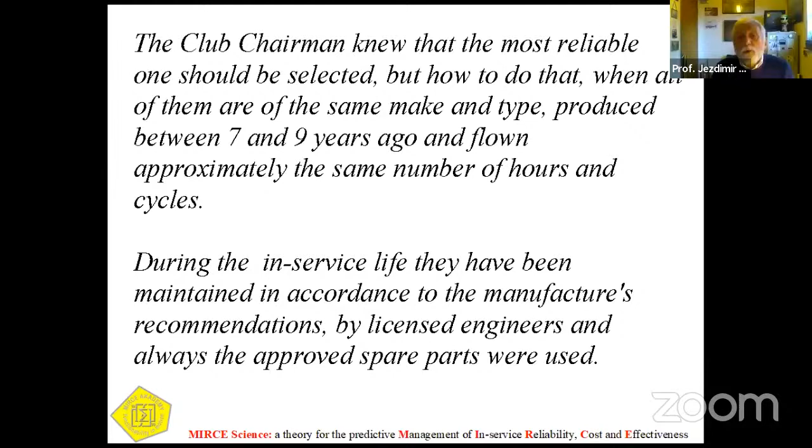During the in-service life, they were maintained in accordance with the manufacturer's recommendations by licensed engineers, and always the approved spare parts were used. So we have a good example of a very well looked after fleet, in accordance with all manufacturer and design recommendations, with qualified personnel. So in essence, this is my illustration. This is what the fleet looks like. Whether we have 2 or 12 or 200 or 1,500 Boeing 747s flying around the world, from outside, from a manufacturer point of view, they all look the same.

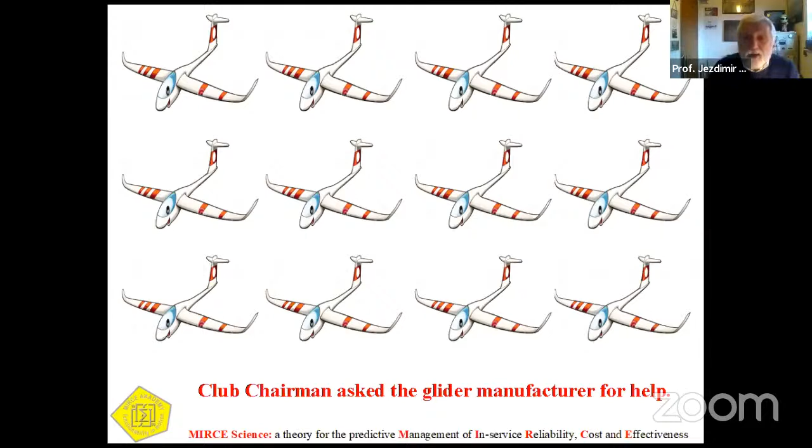So the chairman asked the glider manufacturer for help. Of course, the glider manufacturer says that is very important, we use all our relevant reliability data, and they provided the data. So in typical reliability manner, there is a reliability block diagram, which I am just sketching with 4 components in parallel and series, just to illustrate. Not that I'm teaching you what the reliability block diagram is, just to put things in the story.

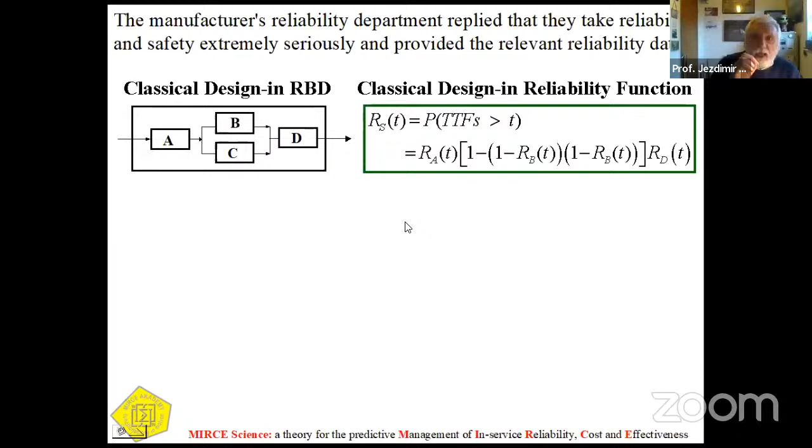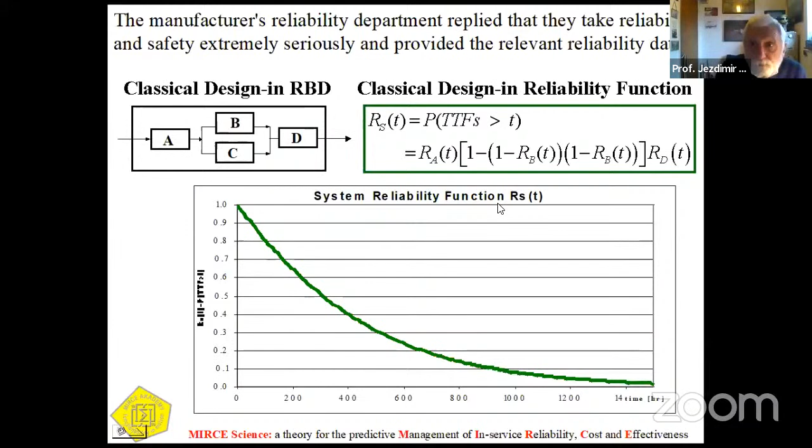We've done the study. We now have our classical reliability function. The reliability of the system is the probability that the system will survive to the time t, with those components connected in series and parallel. And if we put in some adequate information, purely for illustrative purposes, we will get the well-known reliability curve, which we learn in beginning courses in reliability, but that is the fundamental of the last 50 years of doing system reliability. Okay, so now the chairman says, but what is the reliability?

Well, the reliability engineer says, well, it is the probability that the new system will not fail up to the stated time. Well, that really starts bothering the club chairman, because he says, well, but none of my systems are new. They're all 7 to 9 years old. So what do I do? Well, that's really a good question.

Because if we pick up any point on our reliability function, any point, mathematically it is of a neutral nature. If you look at it from the reliability point of view, then it is a smiley face, because that face now tells me that the probability of not failing from here to here is whatever it is. But however, there is another side of the reliability curve. So that is this area here.

So what is that probability? Well, that probability is a very sad face, because this is the proportion of those who started at 0 which are not in service anymore. So now, if they are not in service anymore, what's happened with them? Where are they? What is this probability? How does that probability apply to real life, and what can we do to change it? Because really, what is the meaning of that? That's what I want to say for a not new system.

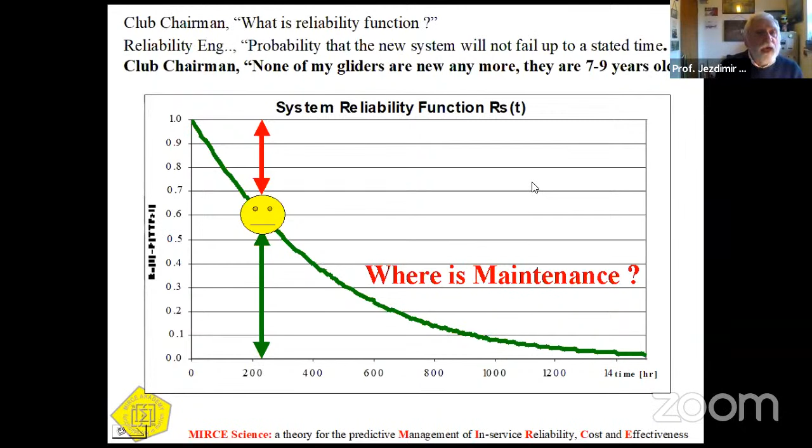Okay. Well, the main objective of this presentation is to introduce you, the audience, as reliability professionals, to the MIRCE Science approach, which is based on the prediction of the real-time reliability based on the current in-service data of each individual system. So the reliability function, which I already showed you, is related to 1, 10, or 1,000 systems of that type. Now, after 5, 10, 15, or 50 years, each of them went through a sequence of events which makes them individual.

And now we don't have an individual reliability function for a 5 years old system with tail number so and so. So the recent developments of new technology based on digital transformation and data connections enable the application of this method to real life. So we had a theory, now it can work. Additionally, considerations regarding the execution of targeted maintenance tasks are justifiable, as the concept of replacement just in case could have even negative consequences on in-service reliability of the system.

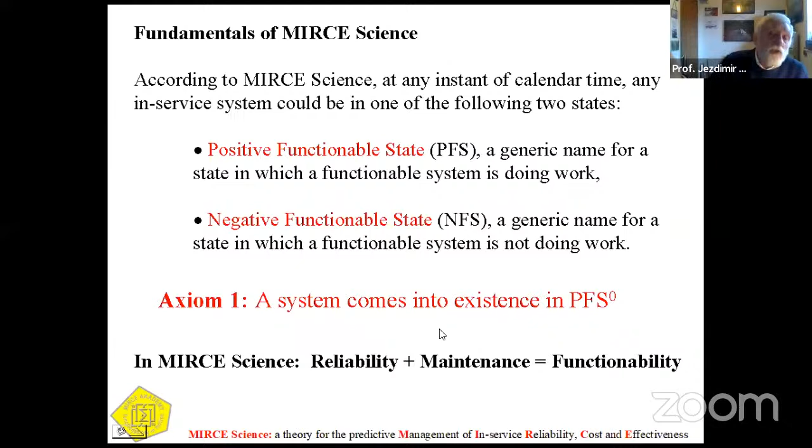In translation, just to put it briefly, in MIRCE Science, functionability is the new word which I created in 1993. But in essence, it is addition, combination of reliability and maintenance. Reliability is design-in characteristics of the system. Maintenance is in-service process, in-service property. So when we put together, we get functionability, a word which is new for some of you, but that is what it is. That's what I call it.

Okay, so the MIRCE functionability field is the new creation which enables a system to exist through time. It is the set of functionability states, positive states for i equals 1 to infinity, and negative states for i to infinity. System is born in state 0, and the system finishes life at the negative states.

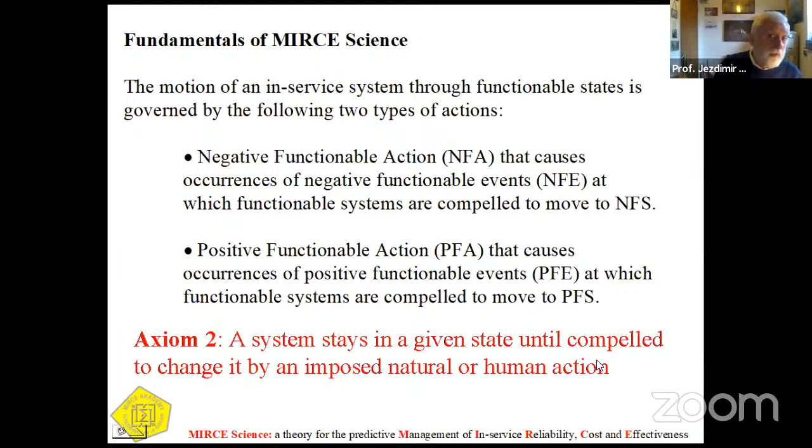Tsunamis, corrosions, fatigues, and the rest are natural actions. Human actions are scheduled replacement, cleaning the filter, inspection of the power plant, whatever they are. So when a power plant has annual inspection, it does not work. In some cases it does. When you change the oil in your car, the car doesn't work. So if you're a taxi driver and you're changing the oil, you're not making money. Your business is down, so you're in a negative state.

What we need now is to find this notion - we talk a lot about physics of failures. What I'd like to touch on here is the physics of maintenance. Because a reliability block diagram is not enough to tell me the states of the system.

For example, units B and C, which are in parallel, in one maintenance option, could be sealed into one box, which is replaced after the failure of both. So the systems are in parallel, but the box works until the system fails. So B and C within the box are in parallel, but from the system's point of view, the system will fail when both of them fail. Okay, so this is now our reliability equation.

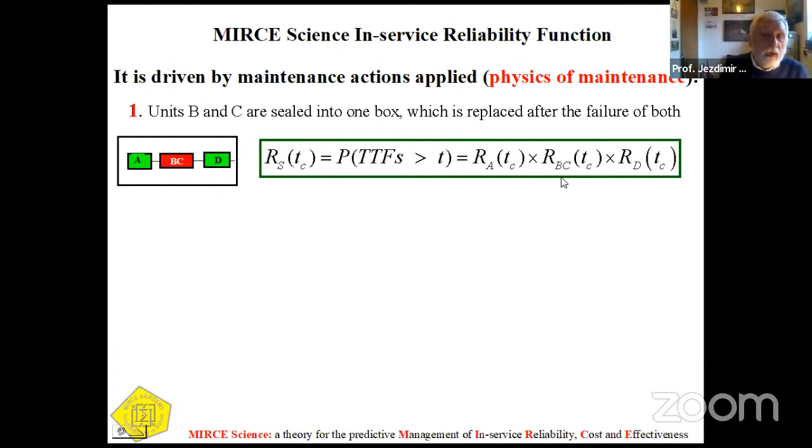From a maintenance point of view, due to maintenance and that design, now we don't have RB and RC in parallel anymore, because we don't know which failed first and which second - we only know when both of them fail. Is it BC or CB? We just don't know. So that's a different picture.

Now another option: units B and C are in the same box, but replaceable after the failure of each one, either B or C. But unfortunately, to do that, we disrupt the in-service function. So that is a different curve. Now, yes, they are in parallel, and during the replacement of one, the second one is working.

There are many other options. Units B and C are totally in separate boxes. Yes, they are supporting the system function in parallel, but they are totally in different boxes, and we can inspect the boxes and do different things.

So what I'm really trying to say here is to address the royal question of addressing the reliability of systems which are not starting from new.

You can see my age and experience. From very, very early on, I always challenged myself on that reliability definition: reliability is the probability that a system will work for a stated time. I always asked myself, but where is the origin of the stated time?

So if I look at my car, is it the stated time when I bought the car? Is it the stated time when I installed my last set of tires, for the tires? What is the stated time for my oil filter, for my brakes, etc., etc.?

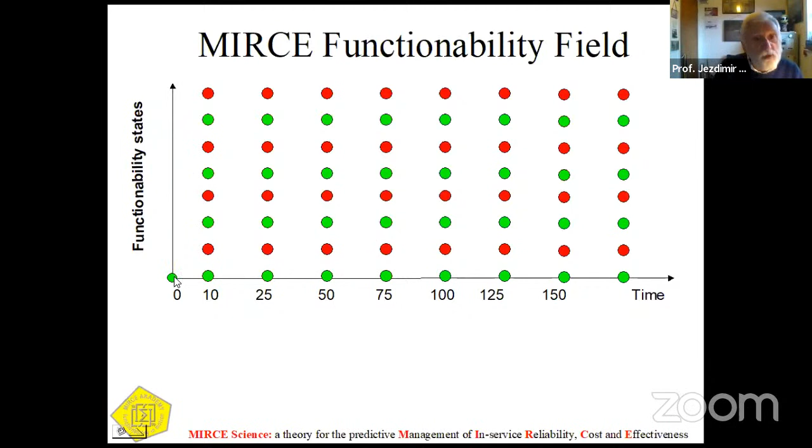In MIRCE science, life has a 0. So now I have a totally different picture: I have my functionability field, which starts theoretically from 0, and we know the whole story, and life goes on. But now, look at this - I can position each individual glider within the fleet on the MIRCE functionability field. Here they are.

So this one here is in positive state 4. This one is in positive state 2. There are 3 gliders here, 2 there, 5 there.

So see, now we have time distributed, real time, calendar time, and functionability states. Now I know where individual gliders are, because I know this is in time, this is real time. Today, this glider is here. And if I look at the logbook for this one, I know precisely the path from new to that place, okay? That is what I mean in real life.

So, according to MIRCE science, reliability of mission success. The mission success for the gliding club and its chairman starts from the moment when the royal foot touches the glider and goes in, and finishes when the glider successfully lands. That might be 20 minutes, 2 hours, or whatever it is.

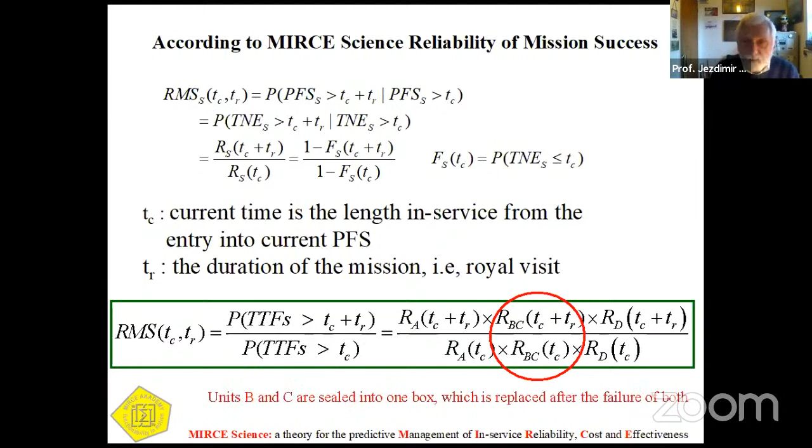That's what I said. So now I have a real picture of each glider, X-ray. I know the conditions. You see, if this one is the same box, I don't know that B has failed. So now why am I talking about maintenance? Because I could do maybe some inspections here, or maybe not.

So you see what I'm now talking about, I'm almost coming to the end, so don't worry, chairman, Dr. Warde, I'm on time. So look, we are now looking inside.

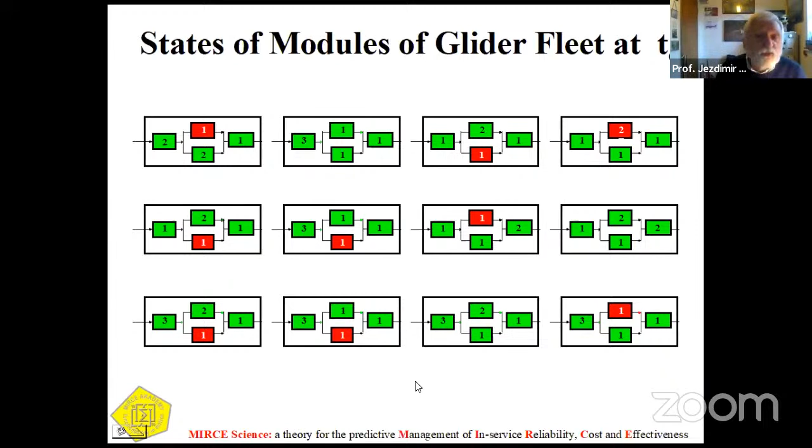We are now understanding the gliders. So there are not 12 identical gliders anymore. See, none of them are identical anymore. All have the same stripes and the same tires and wheels and the brakes and the chairs and the ashtrays, etc., etc. But no, through time, they are changing.

So my penultimate slide, purely for illustration, this is the probability of the Royal Mission success for the existing gliders fleet. Don't worry, I just did this example for myself a few days ago just to show you something. So what we have here, 12 gliders, each of them are currently in the positive functionability state, but due to their histories, probability of being in that state is quite different.

So now, based on this, the chairman of the club says, look, I will choose glider number 1 because it's the highest probability. But now the question is, right, you choose number 1, would you do anything to improve it? Now it's interesting. Now I'm going to shock you, but please don't get upset.

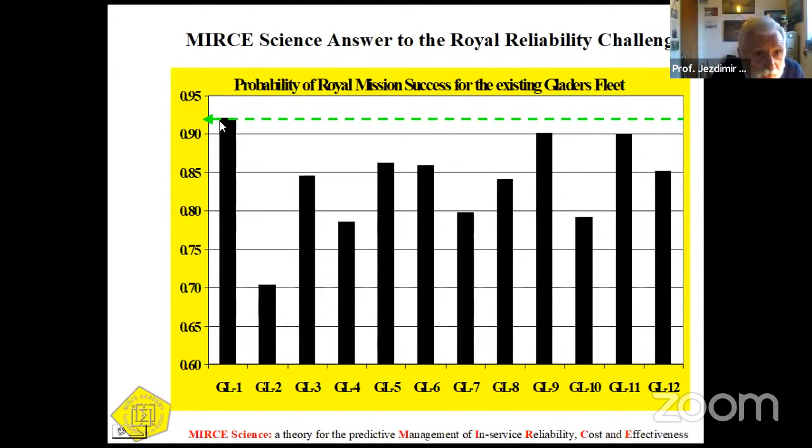What this graph says here, if I go now and hypothetically, this is purely my mathematics working. If I do changes of all others, just in case, you remember what I said? So look, unquestionably 1 is 0.92. So now that 1, which was the black block here, it's not the highest.

So if I do any maintenance tasks on the rest, I will notice now that due to the royal visit, the highest reliability is if I chose glider 9, and to choose glider 9, I have to change components B and C. So that's the total point.

So now, I hope you understood the narrative. Ignore this. If you want to learn it, we can learn it happily. It is simple and easy once you understand the philosophy, once you understand there is a life of each glider.

So my time is coming. What I want to say is that the last graph clearly illustrates the potential advantages of using the MIRCE science approach to the real-time management of individual systems that will deliver reliability, safety, and sustainability of the fleet considered.

So now, every morning with the Air Indigo fleet in Chennai, out of 50, 60 Airbuses or 737s, you know precisely which one is the most reliable because you have the mechanism to do it, okay?

Thank you, Professor. It was a very lively presentation, and I'm sure all the participants got how to use this reliability concept in the field in order to make decisions in real time. So this is a very important talk, and if anybody is having any doubts or any questions, they can ask the Professor.

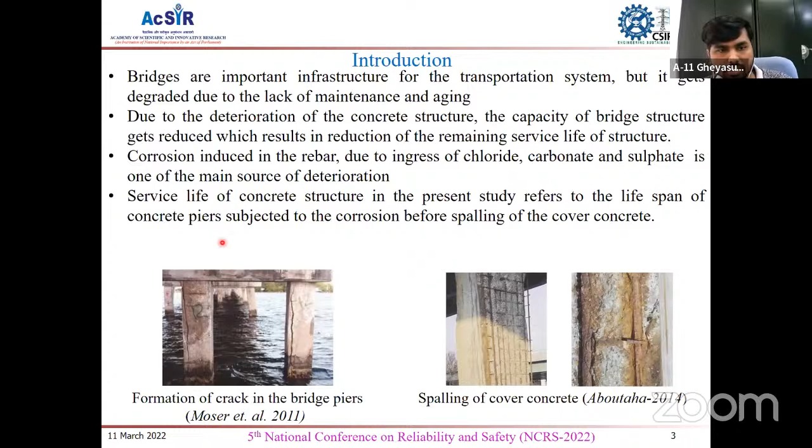So as we can see, whatever corrosion is induced in the concrete is due to ingress of chloride, carbonate or sulfate. Those are the main sources of corrosion. So in this present paper, I'm going to discuss the service life of bridge piers subjected to corrosion before the spalling of cover concrete.

So here are some of the deterministic models available in the literature. If we see the service life of a structure, various models are available. But if we talk about service life, Tuutti's models are the most widely accepted among researchers.

According to this service life model, we can see the corrosion initiation period and the propagation period. Service life equals the corrosion initiation period, T initial, plus T propagation, TP. So service life basically depends upon the corrosion initiation time and corrosion propagation time. But we have modified this service life model by dividing the corrosion propagation time into two parts: first, the time of corrosion before the first crack, and after that, before the spalling of cover concrete.

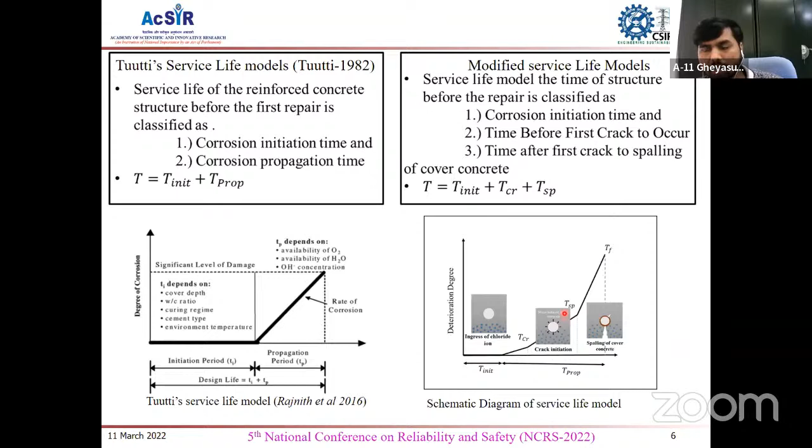So now in this diagram we can see T initial, after that T crack, and after that T spalling. It is not limited to T spalling. After the spalling of the cover concrete, it can take load further, but here we are going to study up to TSP, that means spalling of cover concrete. After the spalling of cover concrete, we need to go for repairing.

Corrosion initiation: once chloride reaches the surface of the rebars, corrosion initiates. The time taken to initiate the corrosion process is called corrosion initiation time. It depends upon the diffusion of chloride into the cover concrete, which can be modeled using Fick's second law. That is how we can model the corrosion initiation time.

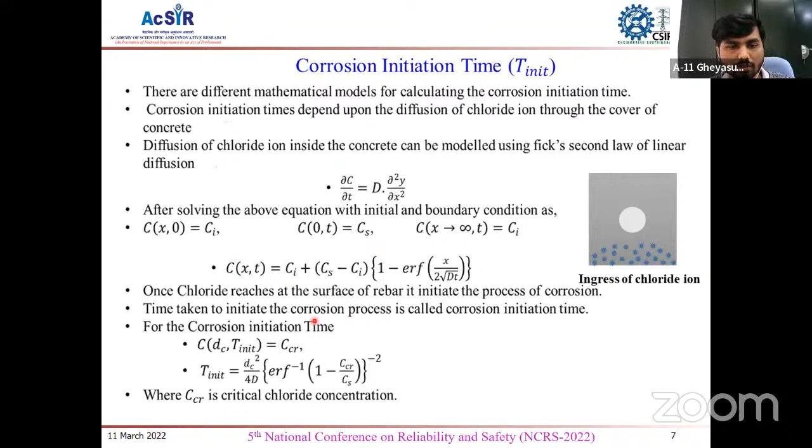After that, the diffusion coefficient, on which T initial depends, depends upon the water cement ratio, curing rate, environmental exposure condition, as well as material properties. In the literature, the model has been defined by Castaneda, showing how the diffusion coefficient is modeled, and with that they have modified the corrosion initiation time, which we are going to use to calculate the corrosion initiation time.

After the corrosion initiation time, we have to calculate the time after the initiation of corrosion. Once corrosion has started, volumetric expansion will start due to the rusting of rebars. Once there is volumetric expansion, hoop stress will be induced in the concrete. If hoop stress is greater than the tensile strength of concrete, then the first crack occurs. For modeling the first crack, we have models available, with which we can calculate the time for the first crack.

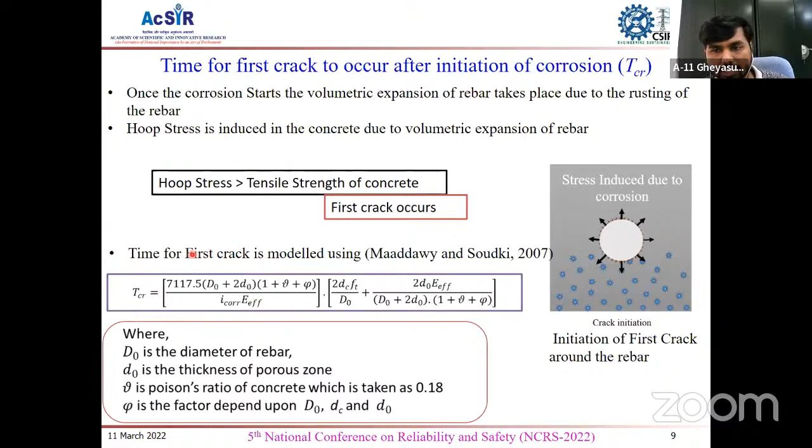Now once the crack has been formed, it will elongate and start propagating. Volumetric expansion keeps going and rusting takes place, so the crack propagates. Once the crack width is more than 1 mm, as from the literature, spalling of cover concrete happens. That time is called TSP, and we can calculate it using this model.

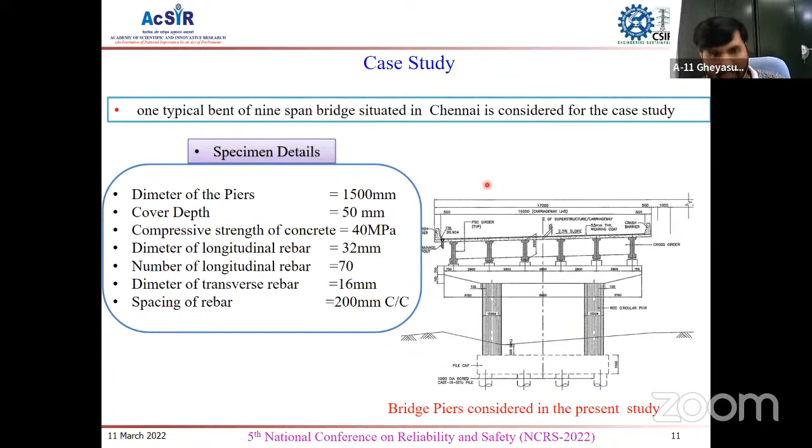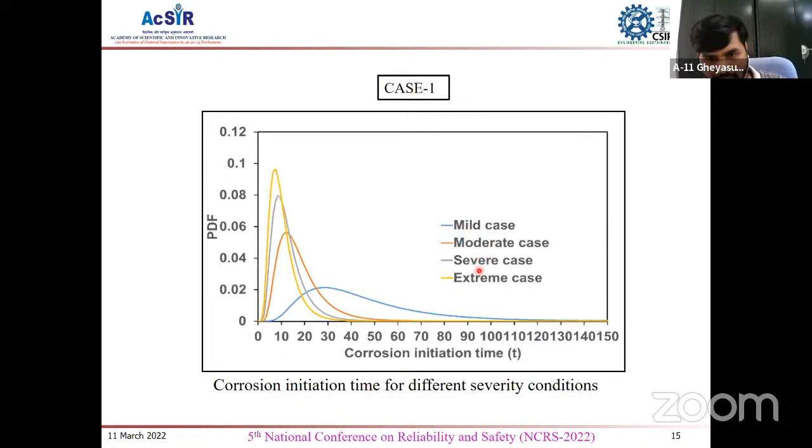For case one, if I have taken this corrosion initiation time, we can see how the corrosion initiation time is affected for the different exposure conditions, like mild case, moderate case, severe case and extreme case. After that, we have checked the distribution, and the log normal CDF is correctly fitting with this CDF.

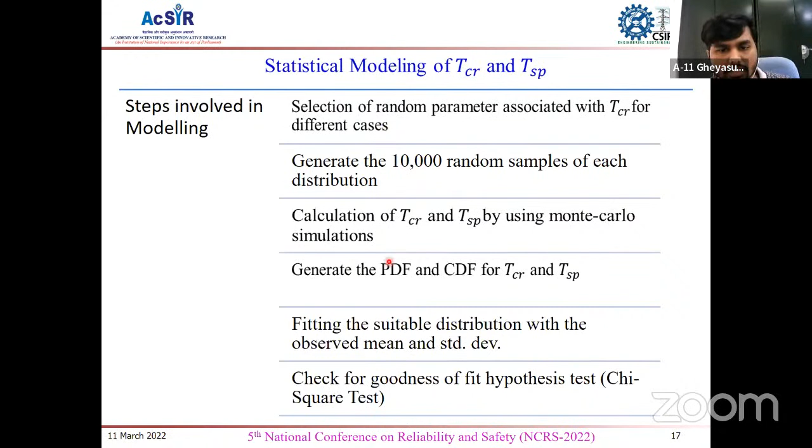Now in this paper, we have modeled the uncertainty for the RCC structure. We have identified the random variables from the literature, and we have calculated the corrosion initiation time, the time for the first crack due to corrosion, and the propagation time. After that, we have estimated the service life for conditions like mild, moderate, and severe. We have fitted the log normal distribution, and we have found that it is passing

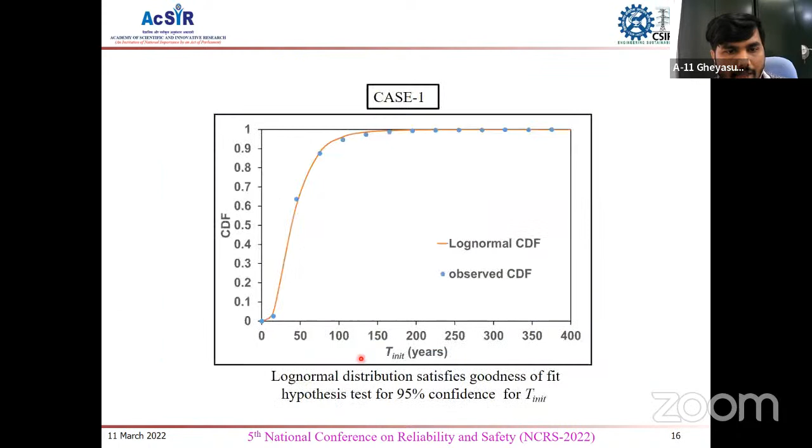I understand, but how do you define mild or moderate? Is it the level of pollutants, or what is the condition? You have not specified what is a mild condition and a moderate condition. Sorry, sir. Is it okay? You could understand now what I am asking? Yes, sir. I'm sorry, sir, I don't know much about that. Okay, fine. And about the confidence interval, confidence level?

Yes, sir. For confidence level, we have like a 5% risk factor. We have chi-square test tables. We did the chi-square test for this observed CDF and our log normal CDF. So we have two CDFs. We took the difference of these, summarized all those things, and checked whether it is fitting using the tables, whether it is passing at whatever the percentage is.

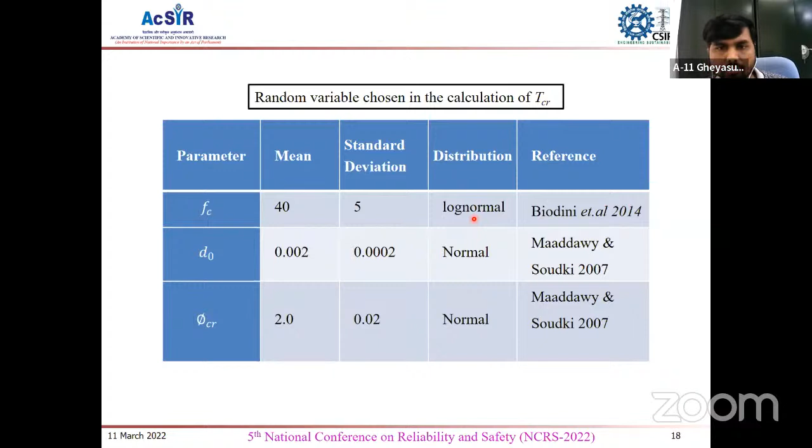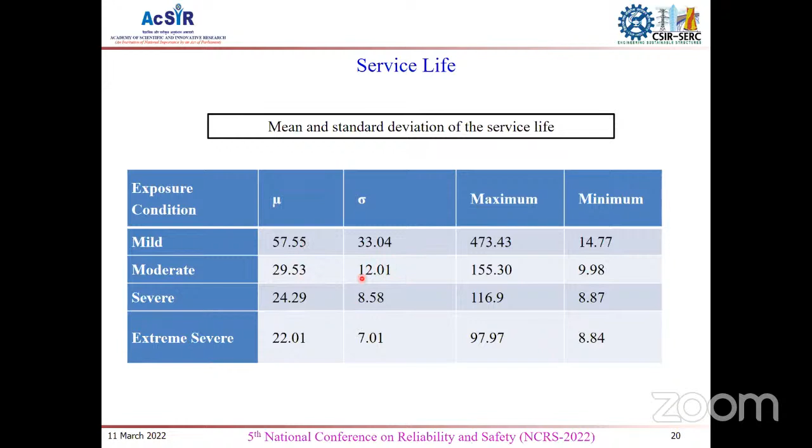Suppose we had only a normal distribution function, then the mean would be in that range and sigma would be less. But we have different distribution functions, so that can happen, sir. But then what is the justification for the selection of distribution? If you say it depends on the distribution, there should be some basis for selecting a particular distribution.

As far as the input parameters are concerned, whatever is suggested in the literature has been taken for the chosen random variables, sir. This is one of the authors, Kamakshi. So for whatever input parameters have been chosen, the suggested distribution functions and COV values prescribed in the literature have been chosen, sir. Based on those guidelines, the samples have been generated.

Okay. Yes, sir. But as you rightly said, there is a huge variation. The mean value is a query because the sigma is so high and very close to the mean, so statistically it doesn't justify. I don't know whether I can tell, but there is a problem in getting the KS test passed for 95% confidence. So only this chi-square test has been done.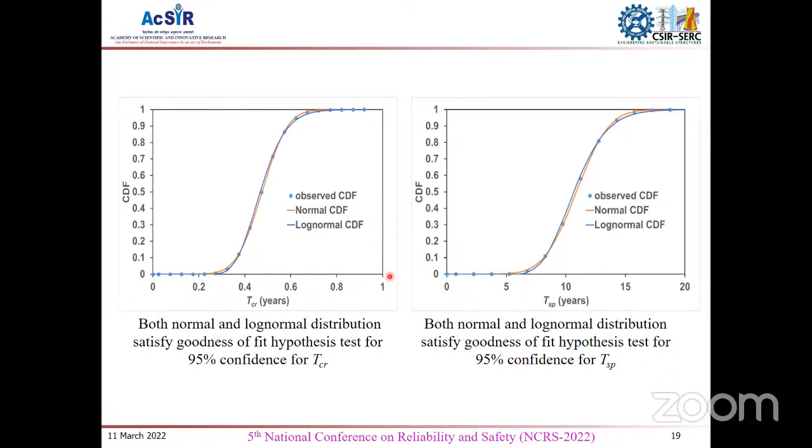Sir, if we see the initiation time, we can show you here, sir, for this mild case. Already there is a huge variation, and there is also one paper in the literature where they have reported the same, that the means and standard deviations will have huge variation.

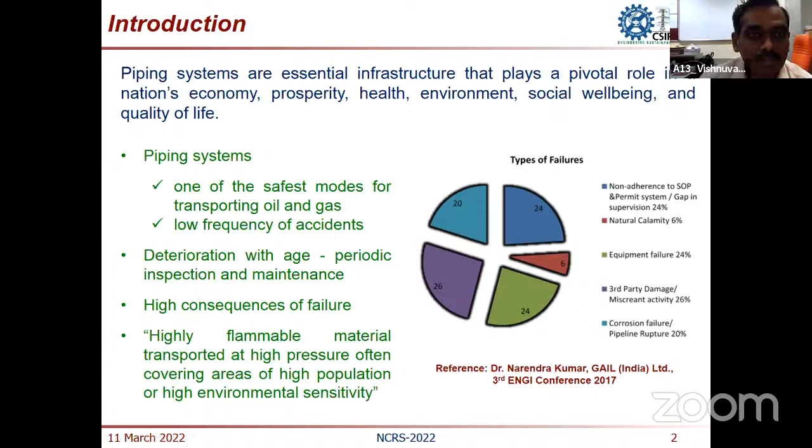So as we know, the piping systems for transporting oil and gas and also petroleum products are essential infrastructure that plays a vital role in nation's economy. And these piping systems are one of the safest modes for transporting oil and gas because the frequency of accidents are less. But nevertheless, the piping systems deteriorate with age, and hence the periodic inspection and maintenance of these piping systems are essential. And once the failure happens, the consequences are high because of loss of life and also the property.

And if you see on the right side, we have a pie chart where the different types of failures are reported in terms of percentage. So, for example, natural calamity 6%, and the failure due to corrosion and pipeline rupture are about 20%. So, this study is mainly related to this corrosion and pipeline rupture failure.

So, if you see the major causes of pipeline failure, it could be either due to external interference or corrosion or metal loss. External interference is mainly due to impact of foreign objects on the pipeline, mainly by third party activities. In the case of onshore pipeline, it could be due to excavation for development of projects such as roads, railways, and construction projects. And in the case of offshore pipelines, it is reported that it is mainly because of the impact of ship anchors or other underwater foreign objects.

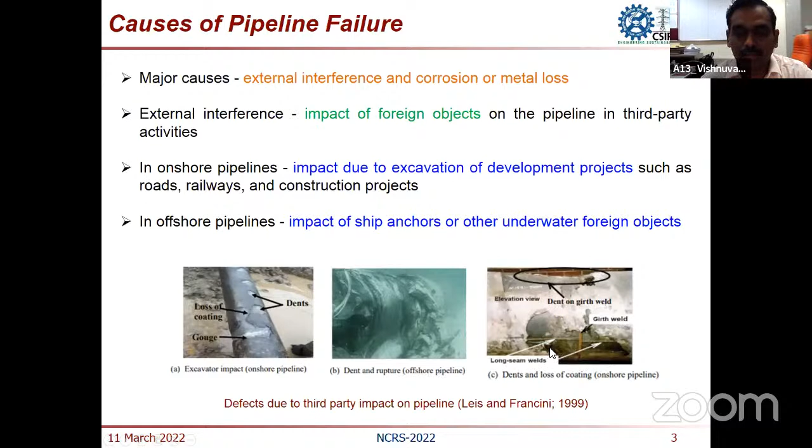On the bottom, we have figures where the different types of defects are shown. In the first one, we have dents, we have loss of coating, and what is known as gouge, which is basically a metal loss on the surface over a larger area. And these are due to external interferences in the onshore pipeline. Similarly, in the offshore, you can see there is a figure with the dent and rupture as one of the failure modes. And of course, we also have long seam cracks in the weld portion as well as on the pipes.

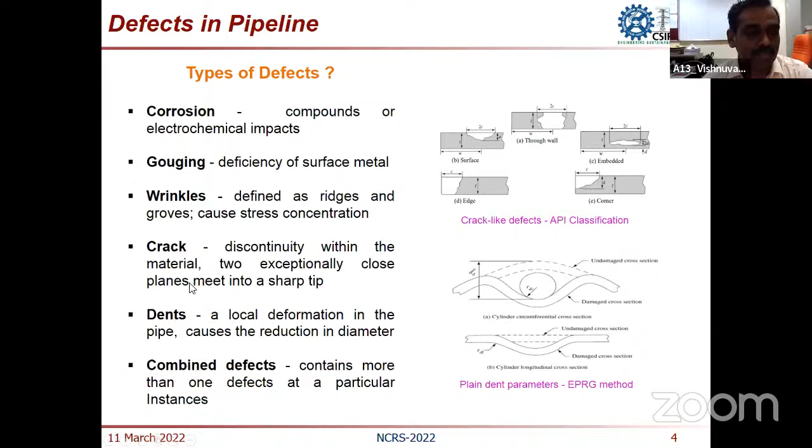And if you take the types of defects on these pipelines, one is due to corrosion. It could be either sweet corrosion or sour corrosion. The next one is the gouging, which I have already mentioned, or the other defect is a wrinkle. We also have cracks, different cracks mentioned here as per API classification. It could be either a surface crack, a through wall crack, an embedded crack or a corner crack. And a dent is another defect, and it could be a combination of any of these defects in the pipeline. So that could cause failure.

In the present study, we have carried out experimental studies on two pipes which are cut removed from the in-service pipeline, which was in service from 1985. One pipe contained a longitudinal seam crack, the other pipe contained what is known as a lamination defect. These are the pipe dimensions: 4 meter length, outer diameter 14 inches, approximately 355.6 mm, and 7.14 mm thick. The grade of steel is API 5L X46. So these are the metal properties.

These defects have been detected using what is known as intelligent pigging method. It is basically an inspection technique where an inspection probe called a smart pig is propelled through the pipeline, mainly to detect material loss due to corrosion and other defects. So the lamination defect and the crack have been detected using this intelligent pigging in the service pipeline. And you can see on the right side the longitudinal seam crack picture.

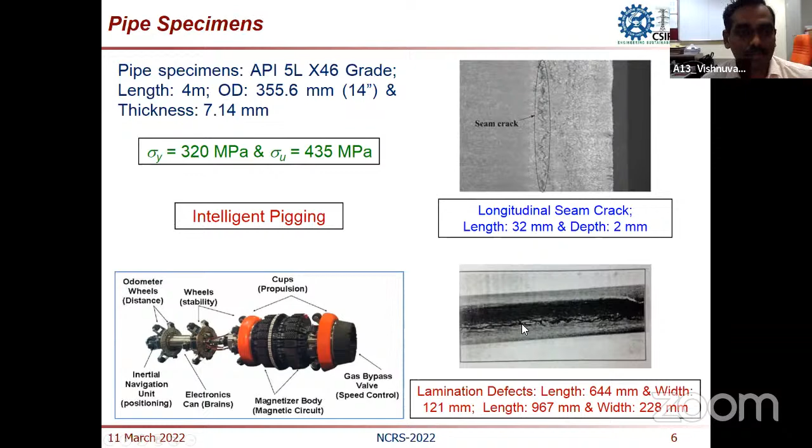The pipes have been instrumented with strain gauges, 2-element rosette strain gauges, one set on the location where there was no defect, and one set close to the defects, both in the case of pipe containing longitudinal seam crack and in the case of pipe containing lamination defects. And there is no standard test procedure for this, so we have come out with a test procedure wherein we have used.

So this is the pipe on the right side, and both the ends are welded with blind flanges, curved blind flanges. The pipe contained two openings to fill it with hydraulic oil and also to monitor the pressure. The pipe was filled with hydraulic oil, and we also devised what is known as a slave cylinder, which was used to pressurize the pipe through a universal testing machine.

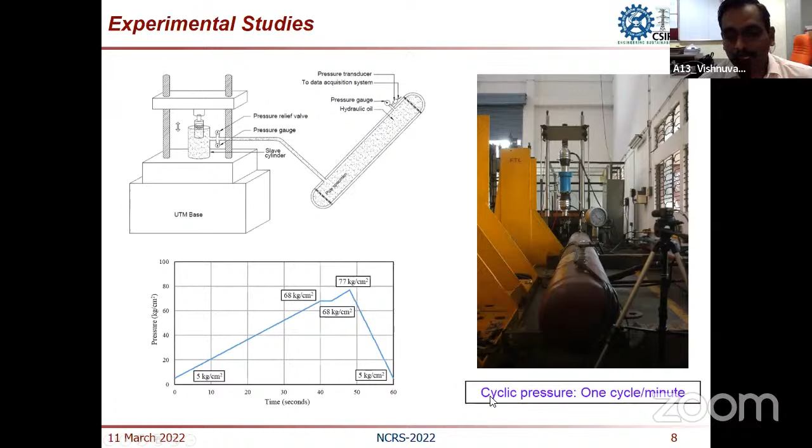This is the pressure cycle which was followed, and this is the typical pressure cycle reported to happen in a typical Indian oil pipeline, with a pressure of 5 kg per centimeter square to a maximum of 77 kg per centimeter square. This pressure cycle was followed at the rate of 1 cycle per minute. As already mentioned, we have used strain gauges at different locations.

Similarly, these are the strain responses for the other specimen with the lamination defects. Here also we are able to detect the failure of the pipe through the strain response, and similarly at other cycles.

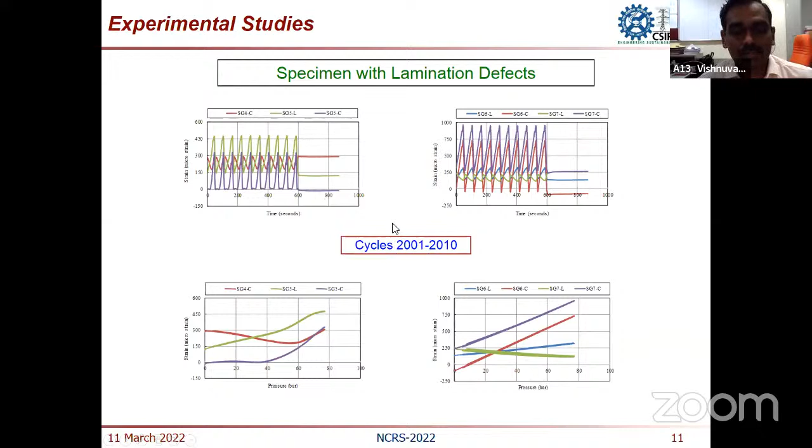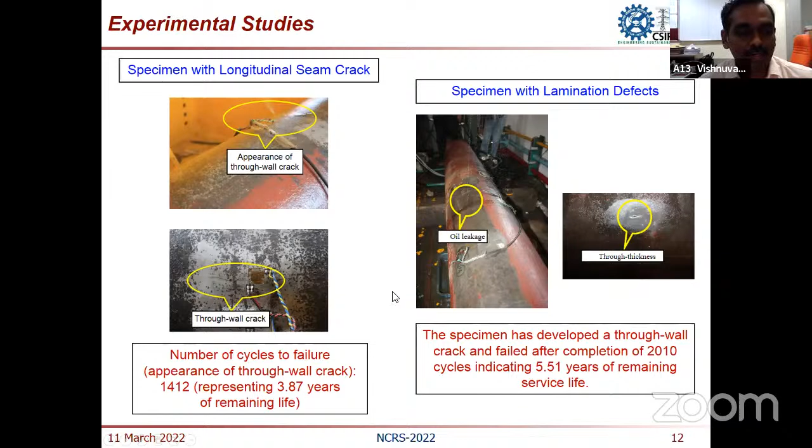Similarly, failure on the other pipe happened at 2010 cycles, representing a remaining life of 5.51 years, at the rate of 1 cycle in a day in the actual pipeline.

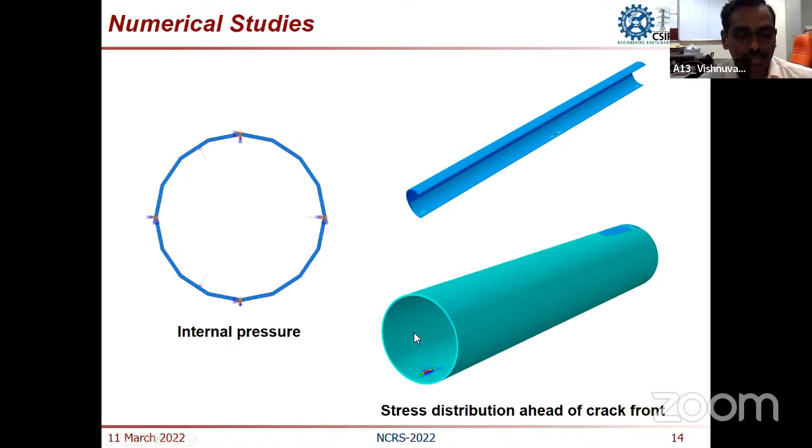We've also carried out numerical studies using finite element software, with the dimensions of the pipe similar to those used in the actual experiment, and also with the same notch configuration. These are typical stress distributions in the pipe, and the location of the crack matched the actual location of the pipe used in the experiment.

So we have evaluated the stress intensity factor, which is basically the parameter representing the state of stress at the vicinity of the crack. Once you are able to evaluate the stress intensity factor, the crack growth rate and hence the fatigue life can be estimated using available models.

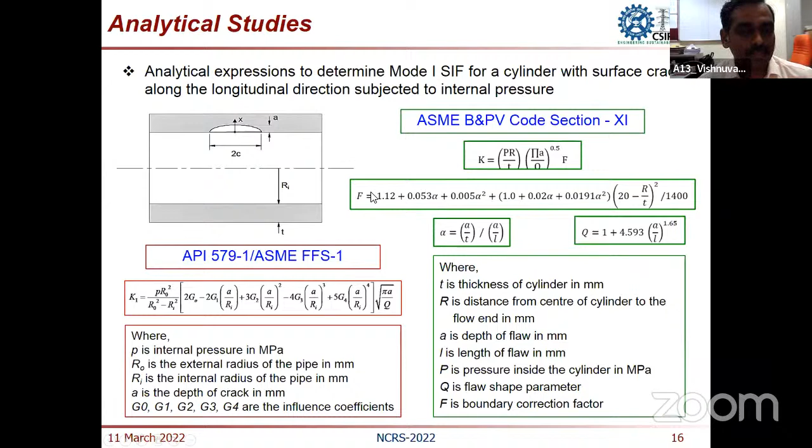One is the API code, the other is the ASME boiler and pressure vessel code. We have used these expressions for calculating stress intensity factor, both at the surface point of the defect and at the deepest point, for different crack lengths and crack depths.

As can be observed, the SIF values predicted using the ASME expressions were always higher when compared with the SIF values predicted using the API standard.

Once we have the stress intensity factor values, the simple model relating crack growth rate and stress intensity factor range is the Paris crack growth model. We have used the crack growth constants, C and M, given in literature - these are the values used.

To summarize, fatigue life studies have been carried out on API 5L X46 grade pipes containing different defects, and the remaining life has been predicted for these two pipes, representing 3.87 years and 5.51 years.

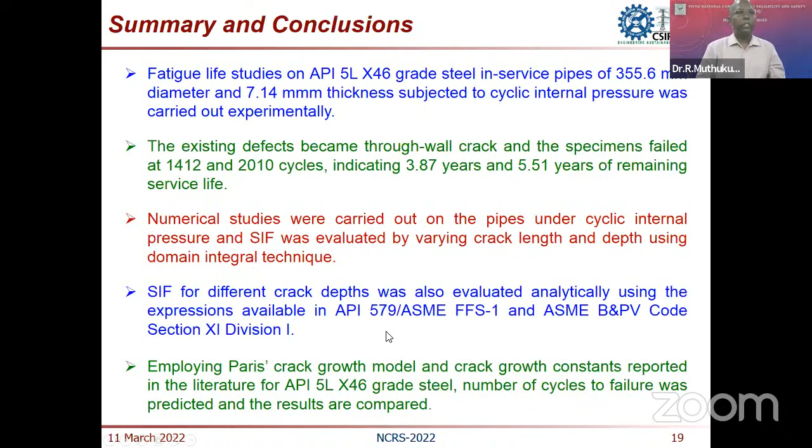Thank you, Mr. Vishnuvardhan, for the nice presentation. It was really very good, with a lot of experimental data. I think you conducted a pressure cycling test, and based on the crack development, you predicted the future crack migration. It's okay, it's fine.

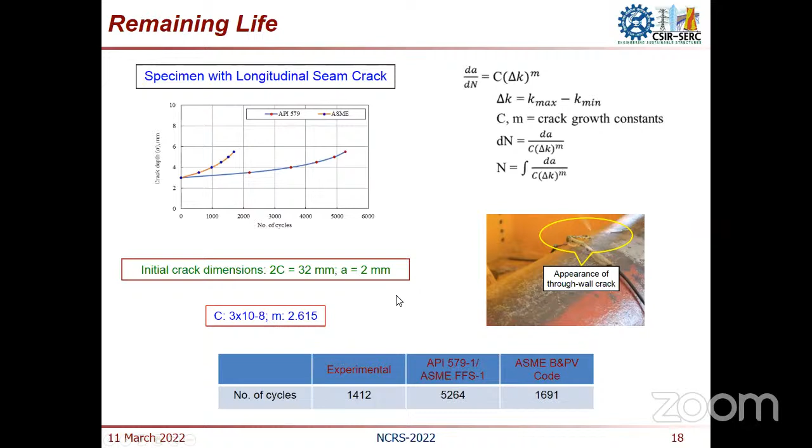Could you also analyze the combined effects in your analysis? No, sir, not in this one. We have not considered the combined effects. Okay, thank you.

Any other participants wish to seek some clarifications, doubts, or questions? If no further questions, thank you very much, it's a very nice presentation. Only one question from me: why is there a difference? Could you analyze the difference between the API and ASME B&PV code?

Yes, sir. One reason could be the crack growth constants, the C and M values used, are basically evaluated for an inert environment, whereas these pipes also experience corrosion, so that could be one reason. The other reason, as I already mentioned, is that these pipes were already in service since 1985, so they're almost 30 years in service. Probably that effect is not considered in the analytical expressions, so that is another reason.

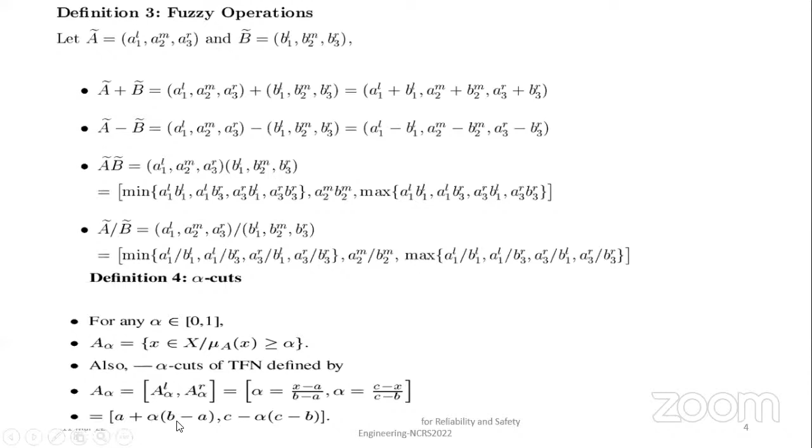Next, the alpha cut set for a triangular fuzzy number: we write A alpha equal to the left value and right value, that is the confidence interval, given by A plus alpha into (B minus A), and C minus alpha into (C minus B).

Next, the crisp relation between dependent and independent variables. Since I'm using multivariate polynomials for fitting, I need to know what is an independent variable and what is a dependent variable. Multivariate means there is more than one independent variable, and the dependent variable also has more than one variable.

So X is a collection of independent variables, X1 to Xm, and Y is a collection of dependent variables, Y1 to Ym. We write the functional relationship Yi equal to f of xi as a multivariate polynomial.

Next, each vector in the multivariate vector is represented by more than one independent variable, that is xij for every i equal to 1 and j equal to 1 to m. Next, the crisp relation can be converted into a fuzzy relation.

We write the fuzzy set x bar equal to a collection of variables: left value, middle value, right value. So the left value can be written as a collection of vectors. Each vector is in multivariate form. Therefore, we write x equal to xijl, xijm, xijr.

Similarly, we write a fuzzy set x m, that is, each vector in multivariate form. So we write the general format xijl, xijm, and xijr. This is the relationship between the dependent variable and independent variables in fuzzy form. So I have used a triangular fuzzy number.

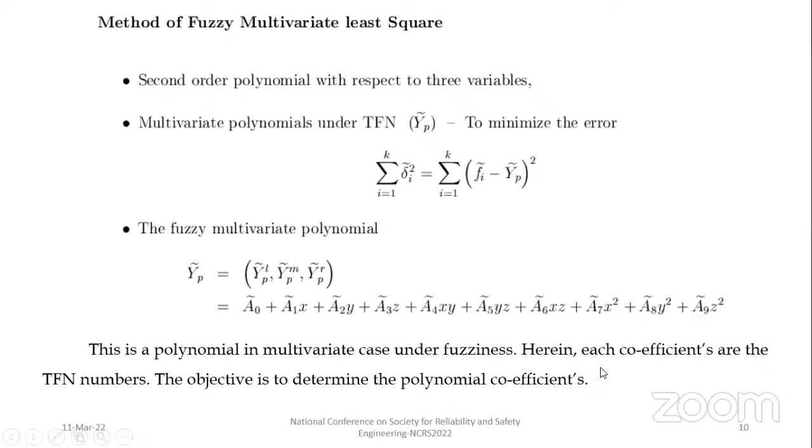So A0 to AN in all are fuzzy sets. I have taken all fuzzy sets in a triangular format. This is a multivariate case under fuzziness. Therefore, herein we differentiate this polynomial with respect to A0, A1, etc., AN. We get this equation in matrix form. So matrix form, I have written like this. Multivariate case, left hand side is differentiated with respect to A0 to A9. I will be getting this matrix equation after writing in matrix form, AX equal to B general format.

Okay. So we need to estimate what is A0 to A9. That is our objective. So right hand side is function values given. So this is nothing but Vandermonde equations. Therefore, I am writing Vandermonde matrix star fuzzy coefficients equal to y bar.

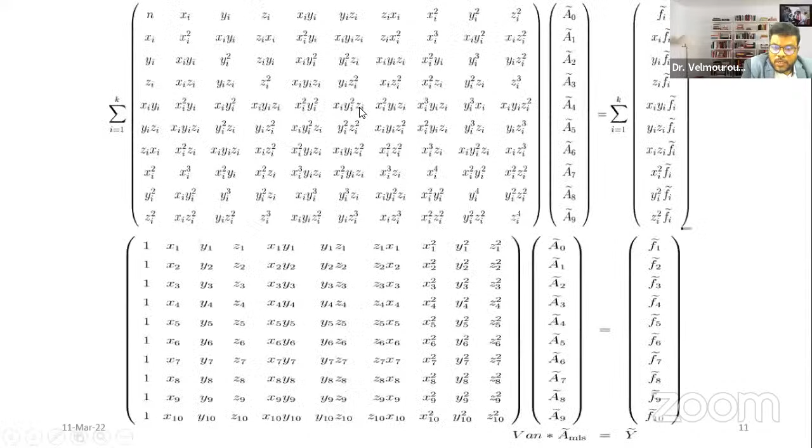Okay, Bhupati, I think you can conclude now. Okay, sir.

So Vandermonde matrix. So I am pre-multiplying. Finally I will be getting polynomial coefficients. So it is equal to Vandermonde matrix transpose times Vandermonde matrix, inverse, times Vandermonde transpose into y bar. So I will be getting the polynomial coefficients. So this is a fuzzy polynomial representation. So I get to estimate A0 to A9, lower prediction, middle prediction, and right value prediction also. So using these 3 predictions, I have to represent a multivariate polynomial under fuzziness.

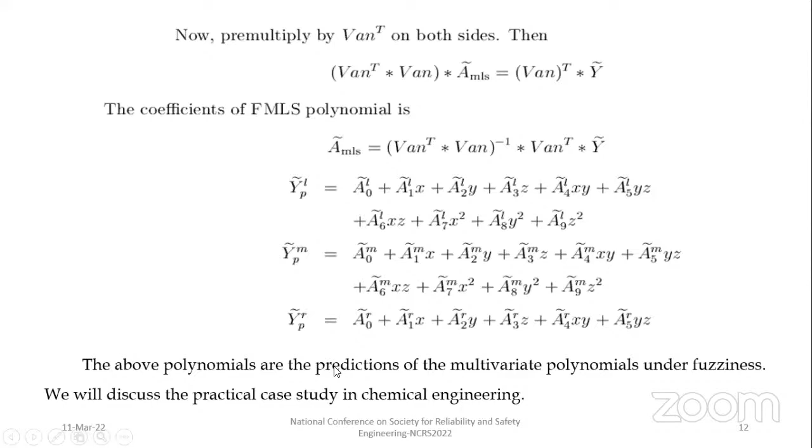So a case study in chemical engineering I will be discussing. The objective of the case study is fitting of multivariate polynomial using mathematical methods, and statistical validation and comparative study will be performed. So the case study is one factor at a time. Actually, it is a chemical engineering case study. There are 3 independent variables and 1 dependent variable involved here. So 3 independent variables: pH value, pectinase loading, and the temperature. And the dependent variable, we have to maximize, finding maximal value for this nano biocatalyst activity.

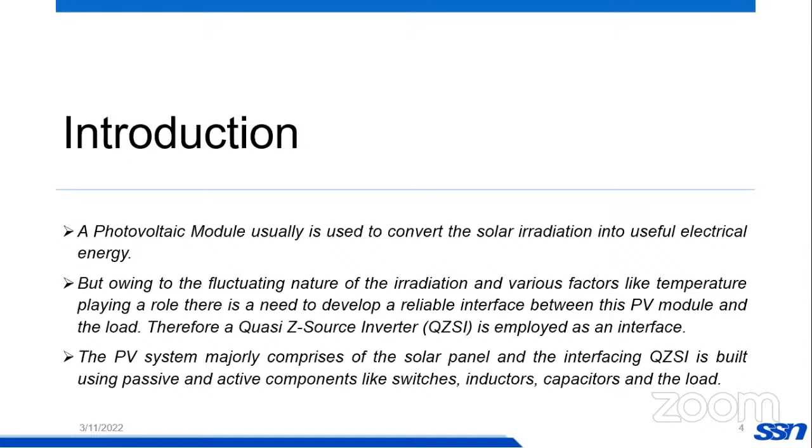Generally the PV system as a whole comprises the PV panel followed by the power conditioning unit, which is nothing but the quasi-Z source inverter, and then it is followed by the load. We have various electrical components like switches, either MOSFETs or IGBTs, inductors, capacitors, etc. in the quasi-Z source inverter. Reliability assessment is very important in very sensitive applications. So I have to go for an efficient model to predict its failure rate so that I can determine the reliability of the system.

In this paper we have focused on a binary decision diagram based model, which is deduced from fault tree, to determine the probability of failure for the proposed system. And I have compared it with the part count model, which is a traditional model, and compared the results. So what is a single phase quasi Z-source inverter? An inverter is generally used to convert DC to AC. This DC is applied from a PV source. The main advantage of going for this quasi Z-source inverter is I can go without a boost converter in between.

So the conventional systems will have a DC-DC converter followed by an AC inverter, and then it will be fed to the load. But for the proposed case, the quasi Z-source inverter will not require this DC-DC converter in between to boost the solar input.

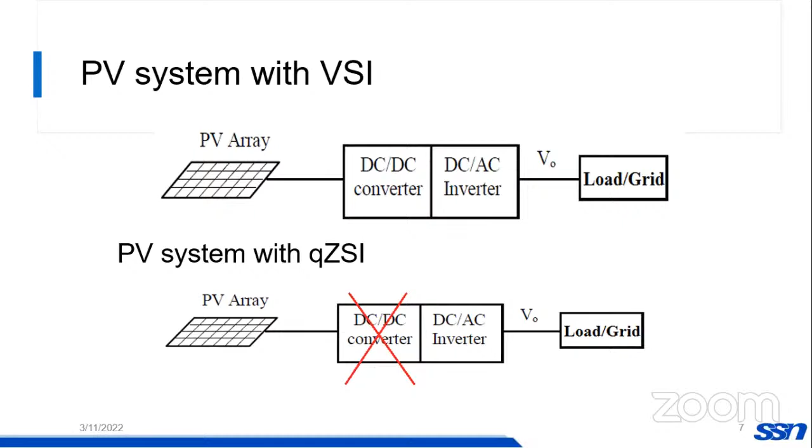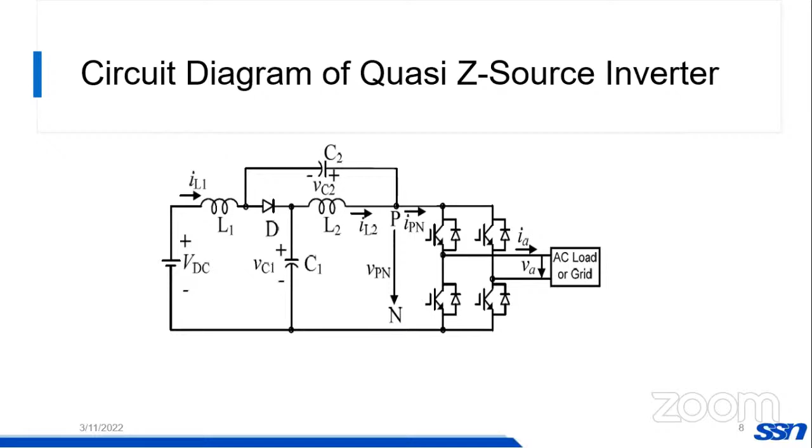So by taking advantage of this short circuit, I'm going to boost the input voltage, as well as during the non-shoot through state, I'm going to convert the DC which is boosted into AC, and it will be finally fed into the load. So these are some of the advantages of the quasi Z-source inverter.

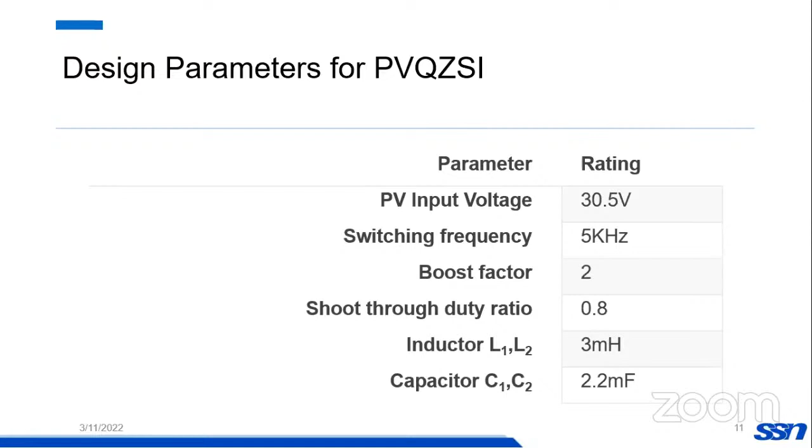And these are the design parameters that I have taken for the proposed inverter. So I have taken a PV input voltage of 30.5 volt with a boost factor of 2. I operated with a frequency of 5 kilohertz. So the shoot through duty ratio is also provided here. So what is this shoot through?

So in the general case, for applying pulses to the inverter switches, I will be comparing a reference sinusoidal wave with a triangular wave, and the pulses will be applied to the switches in a certain sequence. But I have to convert some of the zero states into shoot through states. So I will be comparing the carrier wave with the DC line.

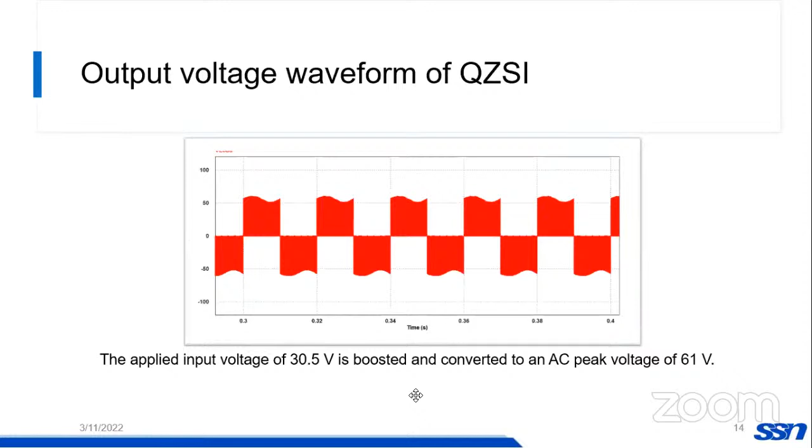So coming to the reliability part, as I have already mentioned, for sensitive applications, I need to estimate what is the reliability. So as we know the definition, it is the probability that the system will perform its function without failure for a certain period of time under the given conditions. So some of the reliability objectives I have specified here. So the main objective is to prevent the occurrence of failures by predicting them prior to putting into a sensitive application. So we need to analyze through certain reliability models.

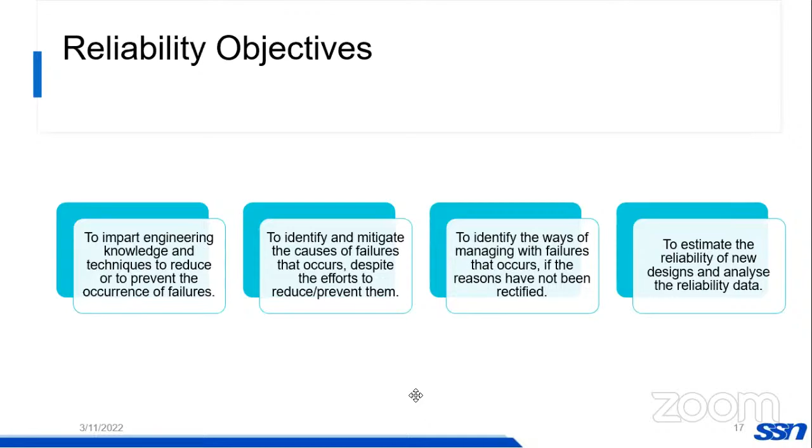So the PV system has majorly 2 units, solar modules and the power conditioning units. So efficiency, modularity, and reliability, these are the 3 important aspects of any inverter. So the modularity and efficiency are both based on the structure or the topology of the inverter and how we are applying the pulses to the devices.

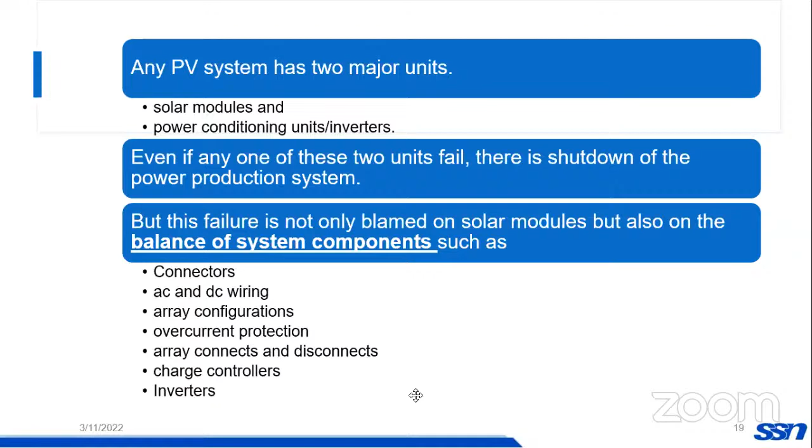But the reliability, which is the third component, is very important because the different elements which are used in the inverter will contribute to failure of the entire system. Maybe the connectors or the wirings, the array configurations, the charge controllers, inverters, anything can contribute to the failure of the entire system. So I need to identify what is the reliability.

So I have gone for a binary decision diagram, which is derived from a fault tree. So a binary decision diagram is one of the mathematical models to find out what could be the reliability, what could be the failure rate. It is just used to predict what could be the failure rate of a particular system. So I have to go for minimal cut sets, the minimum failures that can lead to failure of the entire system.

So for that, I have to first start with the fault tree. So for the fault tree, I need to use the logical relations between the basic failures of certain events. So I have to find out what will be the contribution towards the top event failure. So I have to split the entire system into various subsystems, and each of these subsystems will have various basic events.

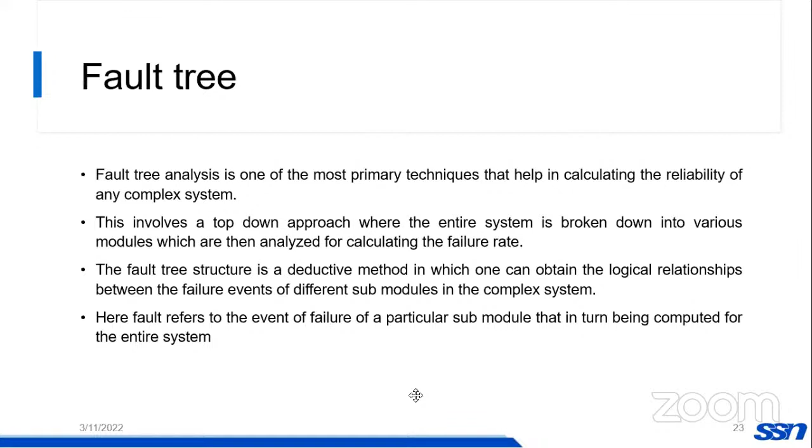So I need to fix what are the factors that will contribute to the failure of the basic events, and how these basic events will contribute to the failure of the subsystems, and how the subsystem is going to contribute to the failure of the main system. So my PV quasi Z source inverter is the top event. Its failure is based on PV module as well as inverter.

When I talk about PV module, we have the solar arrays as well as charge controllers. The solar module manufacturers themselves will give a warranty of 20 years. So coming to the inverter part, I have the quasi Z source inverter's impedance network as well as H bridge. So the impedance network comprises of inductors, capacitors and the diodes, and the H bridge comprises of the switches, MOSFETs,

the semiconductor devices. So among all these basic events, the failure of the inductors or the capacitors, the diodes or the MOSFETs will contribute to the failure of the H bridge and the impedance network. So any one of the failure in these two systems will contribute to the failure of the inverter, and finally the PV based quasi Z source inverter is going to fail.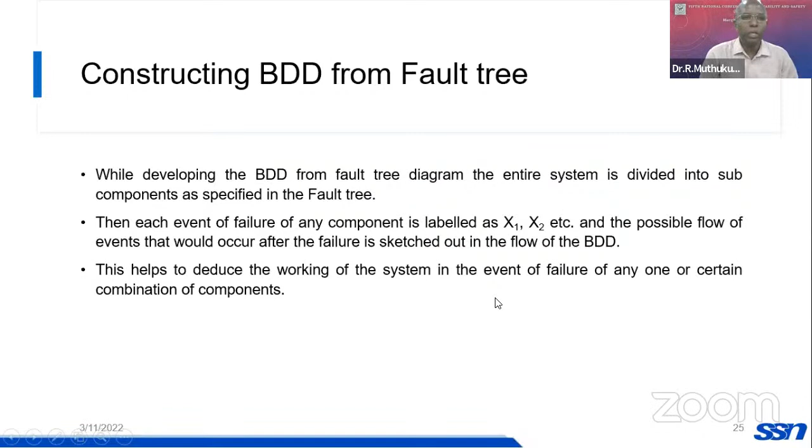Sorry to interrupt, madam. Actually, we are running short of time. Yes, sir. But be quick, or I think the conclusion you can tell about, madam. Yes, sir. I'll just take 2 minutes of time to complete. Sorry. Thank you. No problem, sir.

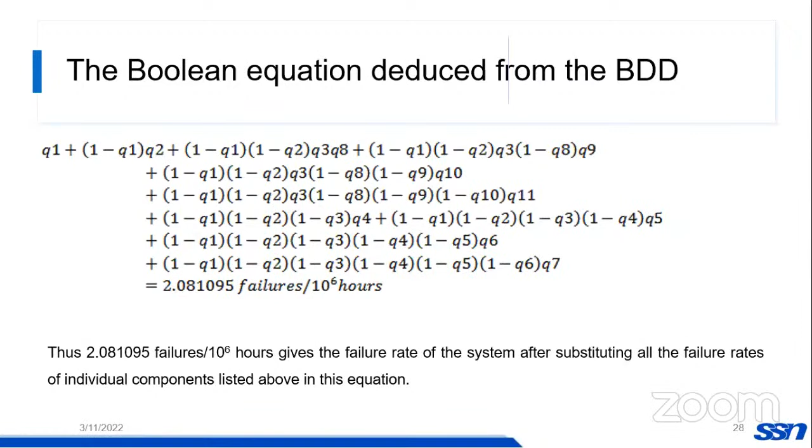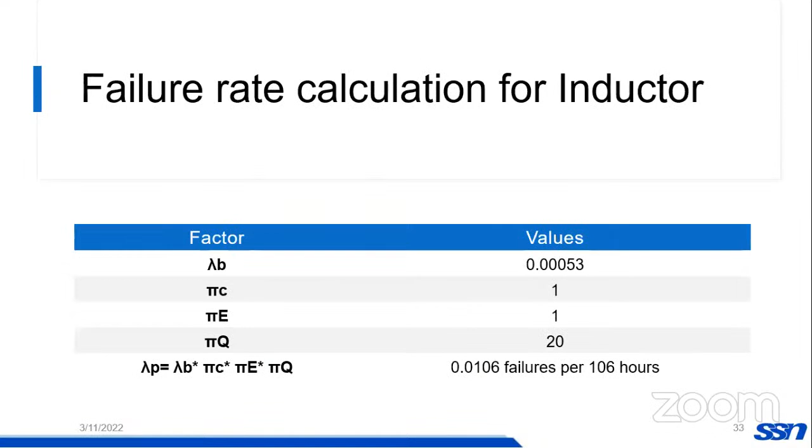So what are the factors that will contribute to the failure of the basic systems? So with this, I have analyzed that the failure rate is 2.08 for every 10 power 6 hours. So comparing it with the part count model. So part count model is a very basic model. So we have taken the database from the military handbook 217. And these are the various factors with which we have computed the failure rate of inductor, capacitor and diode, MOSFET.

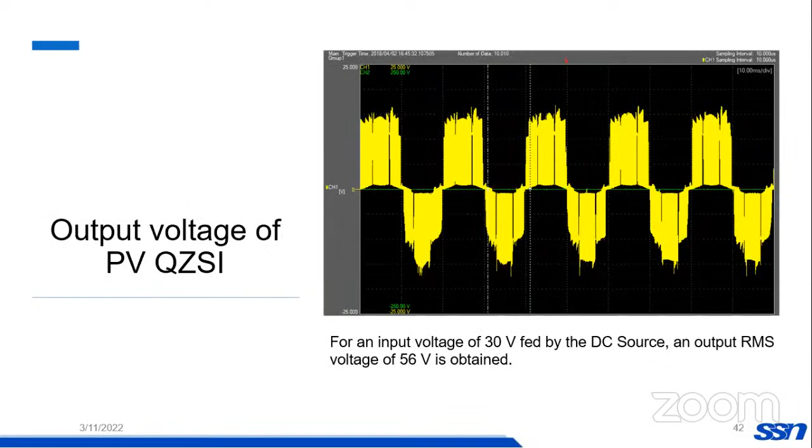So the conclusion of my presentation is, an emphasis is given on the reliability estimation of the quasi Z source inverter fed by PV, and I have compared the results of part count model as well as the binary decision diagram, and further investigations have to be done based on the hardware model.

Yeah, thank you, madam. Very nice presentation. Thank you, sir. I think it's a new idea to integrate the FTA concepts with basically the hardware. Already you have attempted a hardware, and still you go with the design technique FTA, and I think a very nice conclusion you have arrived at.

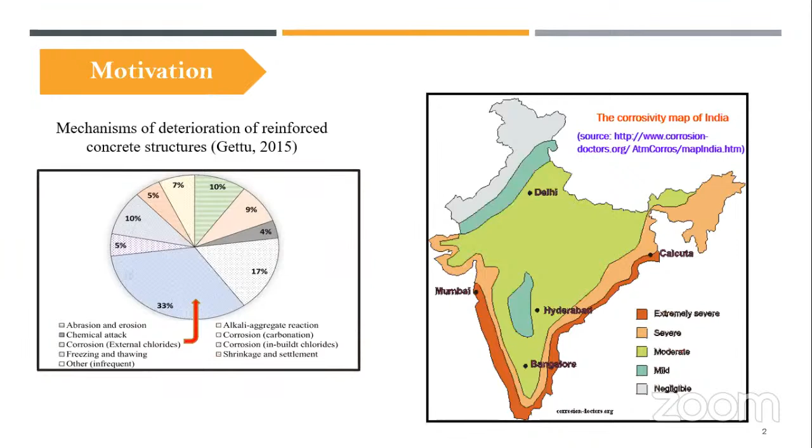In such cases, chloride-induced initiation time becomes the service life, because corrosion propagation time is relatively small. The right figure shows the corrosivity map of India, where we can see India has a long coastline of approximately 7,000 kilometers. Being a tropical country with high temperature and high humidity, chloride-induced corrosion becomes a major problem that needs to be addressed.

For estimating corrosion initiation time, we need to first model the process of chloride ingress into the concrete cover. Most designers assume diffusion is the primary transport mechanism in concrete, since the convection zone in the concrete cover is relatively small. Hence there is a lot of literature based on diffusion models, which are based on Fick's second law.

However, such models have some limitations. They assume the concrete material is homogeneous and assume a constant diffusion coefficient. However, over the years, this limitation has been slowly addressed, so now time dependency of the diffusion coefficient as well as time dependency of surface chloride concentration is taken into account.

And for considering the heterogeneity of the material, madam—sorry to interrupt, yes. If you have the case study, you can go directly to the case study, madam.

So in this presentation, I have proposed a subdiffusion model for modeling the chloride ingress into the concrete cover.

There are a lot of experimental studies in literature showing that the pore structure of concrete is fractal in nature. Fractals are self-similar patterns that keep reoccurring at different scales. Janett explained the process of diffusion of ions through such fractal space by a process called the subdiffusion process.

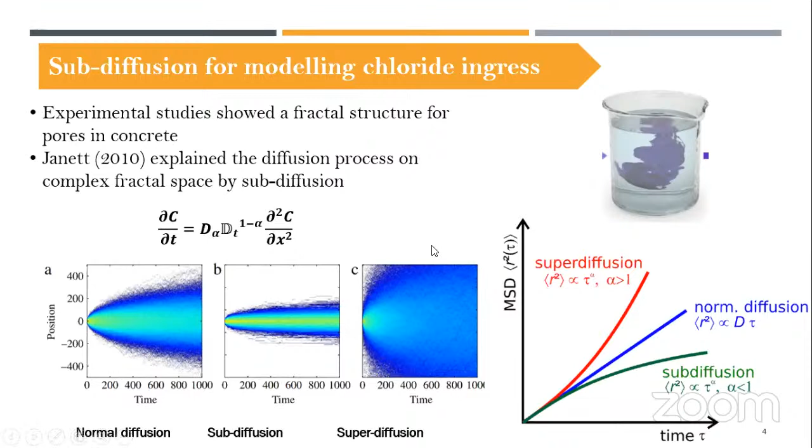Unfortunately, we don't have an analytical solution for this fractional time partial differential equation, so we have adopted a numerical solution based on the finite difference method.

This solution is conditionally stable, which is a limitation. However, the fractional operator involved in this equation plays a very major role in modeling. As we can see from the figure, the green line is normal diffusion, which is also Brownian motion. The Riemann-Liouville fractional operator models the process as a subdiffusion process, as seen from the blue line at larger times.

However, the Caputo-Fabrizio derivative operator, previously used in the literature, models the process as a confined diffusion process.

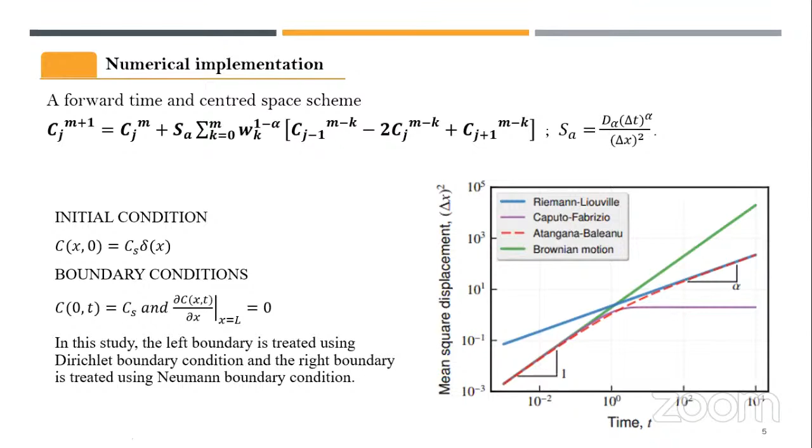In this present work, we have modeled the process using the Riemann-Liouville operator, with the initial condition considered as a Dirac delta function. The boundary condition at the source end is the surface chloride concentration, and at the other end, the derivative of concentration is assumed to be 0.

There are three parameters involved in the solution: surface chloride concentration CS, alpha which is the exponent, and D-alpha which is the diffusion coefficient.

Please conclude, madam. No, I think it's time.

These parameters are fitted in MATLAB, treated as an optimization problem. A least square objective function is used, which is the least square error.

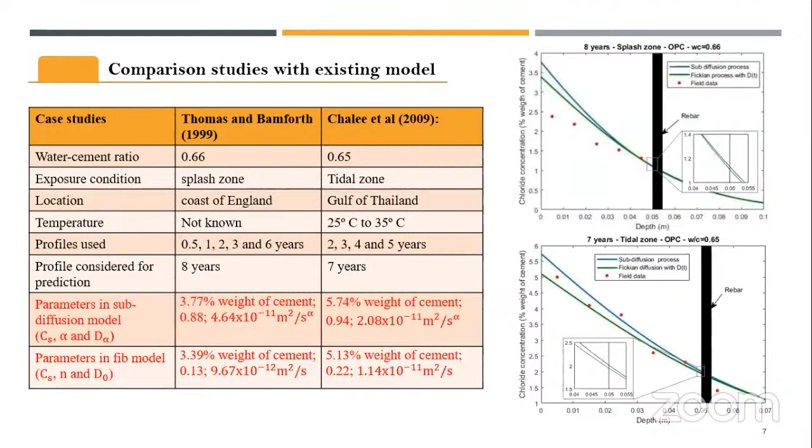Next we move to corrosion initiation time. From the numerical solution, we get a matrix whose elements contain the values of chloride concentrations. The rows represent the location and the columns represent the time. By scanning the row that corresponds to the location of reinforcement, we can calculate the corrosion initiation time. This is how corrosion initiation time is predicted.

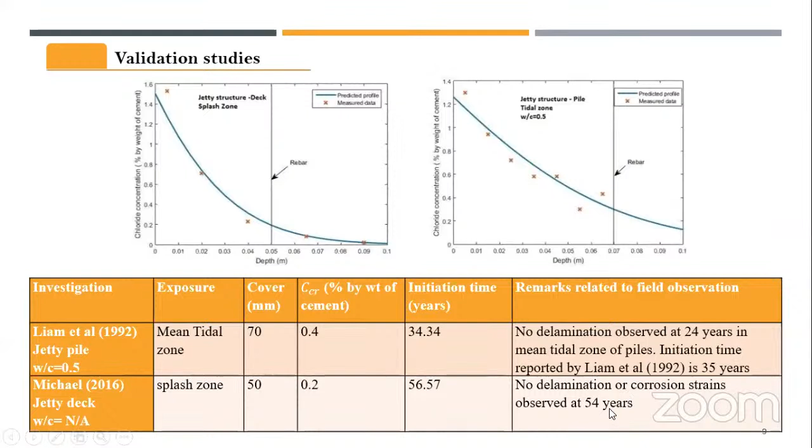The results are also validated. For this purpose, two case studies from the literature have been taken. These are real structures, jetty piles - one jetty pile and one jetty deck. The model is validated using these two cases, and we can see that the corrosion initiation time in the case of Liam is around 34 years, and Liam in his paper proposed the initiation time to be 35 years. In case of Michael's data, the corrosion initiation time is around 56 years, and the age of the structure at the time the paper was written was 54, with no delamination found at that time.

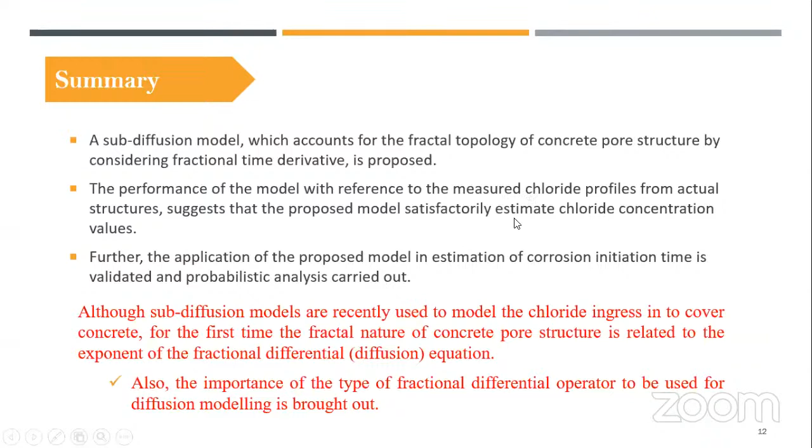Thank you, madam, for the nice presentation. We can take one question from the participants, otherwise I think you should be available to answer queries over mail. Any questions from the participant side? Okay, thank you, madam. Thank you very much for the nice presentation. Thank you, sir. Thank you. You can log out.